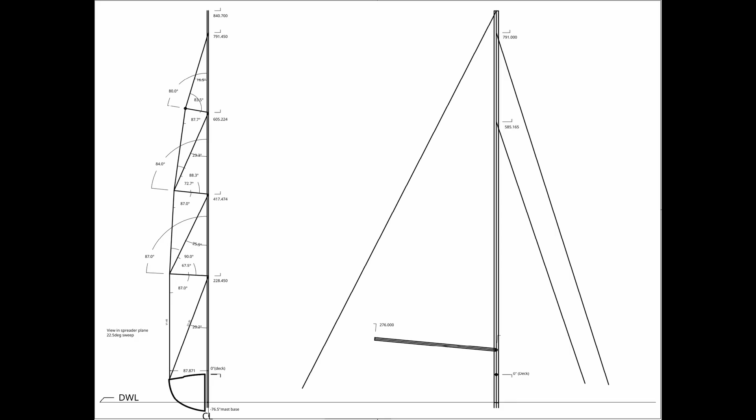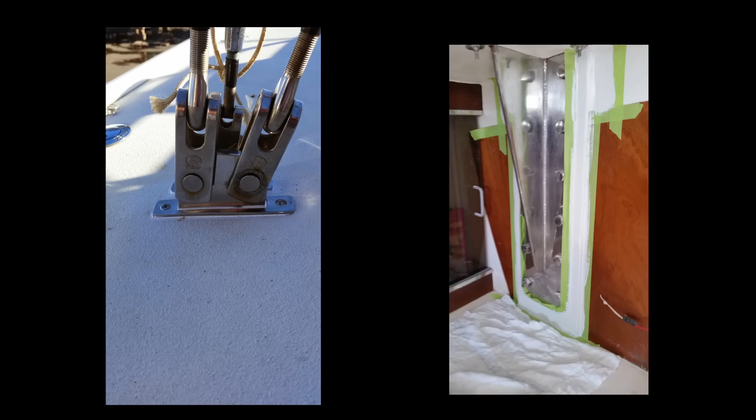For those of you who don't know what a chain plate is, it is a very important piece of a sailboat that connects the standing rigging of a mast to the hull. Usually they are built out of stainless steel, but we are building ours out of carbon fiber.

One of the most fun and surprising parts of this project has been the incredible support that we get from the community surrounding it. One of those people that has been helping so much is Evan, the naval architect. He has been helping us from the very beginning of this project, and one of the reasons I really like his help is because he is also a cruiser, and I feel like him and I have the same kind of philosophy when it comes to what we wanted out of the boat.

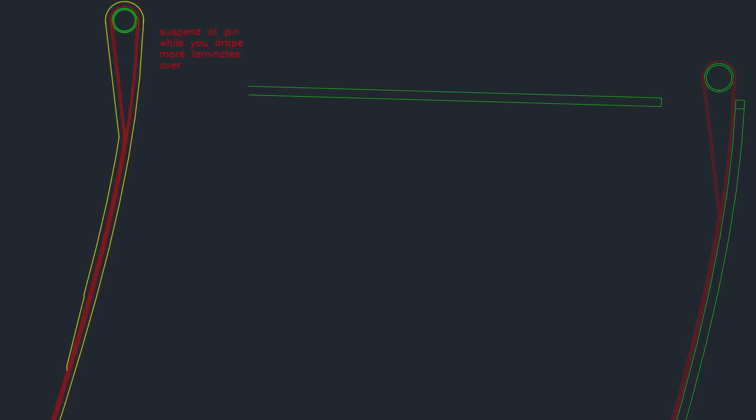He has been helping us from the very beginning, doing stuff like help design the backstay chain plates. He helped me evaluate the masts that we were looking at, making sure that they would work in the boat. And most recently, he's helped a lot with designing the shroud chain plates. We got to talk with Evan on Zoom a couple weeks ago for the first time.

Would you mind telling us a little bit about yourself, like what your sailing experience is? I've been sailing since I was about 10 or 12. My wife and I met at sailing instructor school. So we were at a school to become sailing instructors. And so we had this shared background and we decided to go off and see the world. So we bought a 30-foot sailboat and sailed down to Mexico in our late 20s, early 30s, and ended up on the East Coast of the United States.

And there I got a job working for Bruce Farr's company, Farr Yacht Design. So I was involved with a lot of high-end design work. So America's Cup boats and Volvo Ocean Race boats and IMS racing boats. And so I got a lot of composite design experience there, which was great. My actual naval architecture background, I'm a mechanical engineer by training, but all the electives I did were naval architecture electives. We moved back to Vancouver.

We bought another sailboat, this time a 40-foot catamaran. Did a huge refit. I always promised my wife I'm never going to build a boat, but I built about half a boat. You go through 100 gallons of epoxy, I think that's about half a boat's worth. So we did a major rebuild, refit, and sailed around the world in that one.

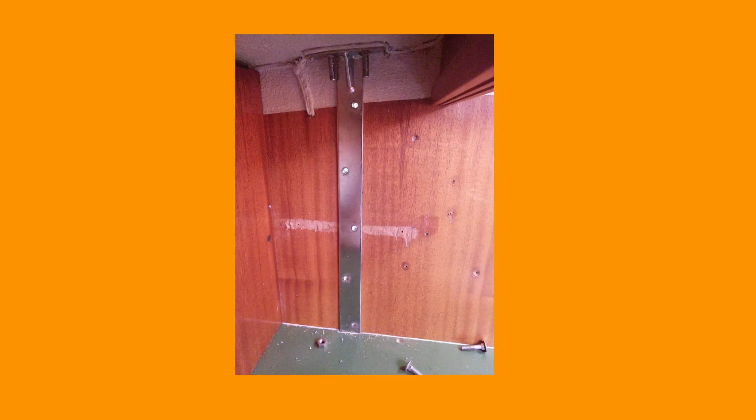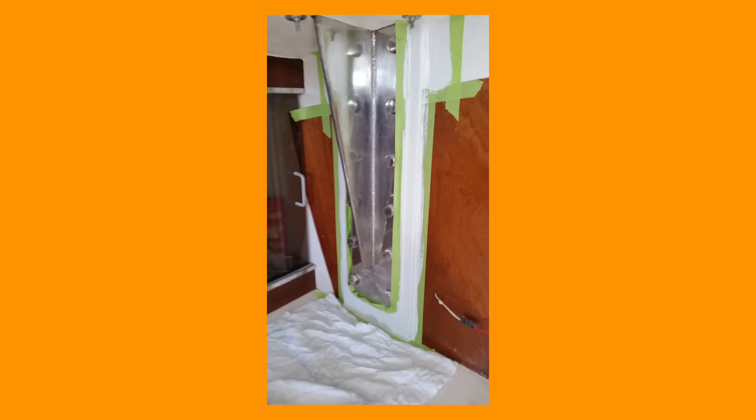Builders like stainless steel chain plates because they're cheap and they're fast. They take a piece of flat bar stainless steel, they drill half a dozen holes and maybe one big hole at the top for the turnbuckle, and they bolt it on the boat with some caulking and that's it, right? The installation is quite quick and it's very cost effective. So that's why builders like stainless, and it's the default for most boats.

If you look at the world of high-end custom race boats, everyone does carbon chain plates. And even though the disadvantage is cost and labor hours, right? They take longer to build. There's a bunch of advantages.

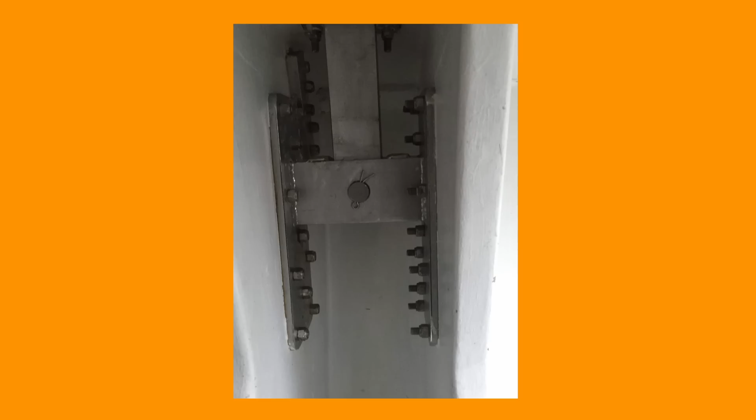They're lighter, right? A big heavy piece, especially on the size of Duracell. I saw you taking out the old stainless chain plates, right? Those are tens of pounds as opposed to a few pounds for a carbon chain plate. So there's a weight advantage. The bigger advantage, I think, that a lot of people don't recognize is durability and bulletproofness.

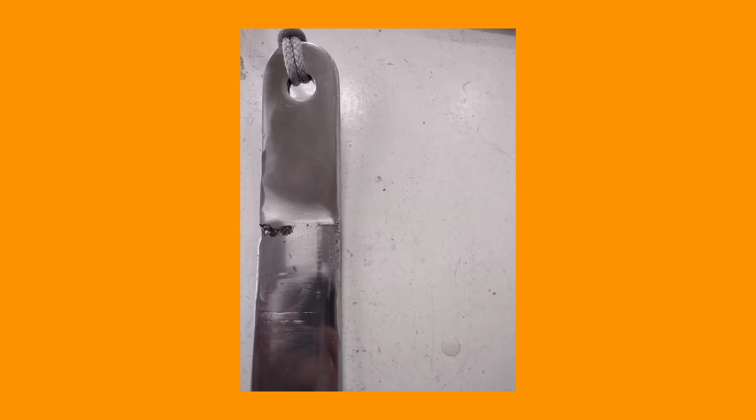When you design a carbon chain plate, because the stuff is so strong, you can put in enormously large safety factors, which, everyone likes to look at the chain plate and think it's never going anywhere. But with stainless ones, you see a lot of chain plates after 20 years, they get crevice corrosion. If it passes through the deck, prime spot, you'll see pitting and stuff like that. And it also fatigues. And you don't see that happening a lot of the times.

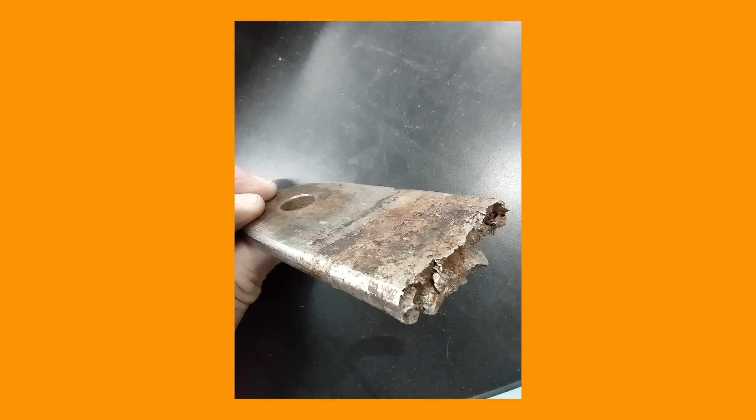And you just have to look at how many people lose a mast because a chain plate cracked, either corrosion in the back of it or it was embedded in fiberglass, but there's so many ways it can fail. So I sort of think of it, carbon fiber is the better choice if you can do it, mostly because stainless is not that great for long-term durability. It looks nice and shiny when it's new, but 10 or 20 years down the road, probably closer to 20 years down the road, there are real issues with it failing.

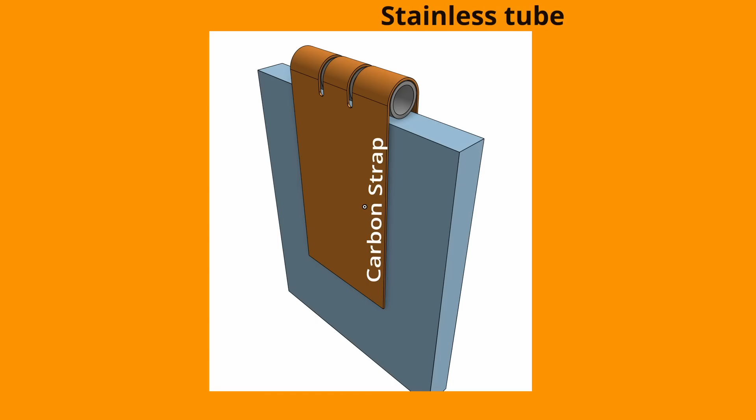This is the basic concept of how a carbon chain plate is built. A strap of carbon goes over a tube which is all laminated to the boat. This can be done many ways, in knees or bulkheads, or just installed into the hull itself. The tube and carbon then have slots cut into it to fit the toggle for the turnbuckle.

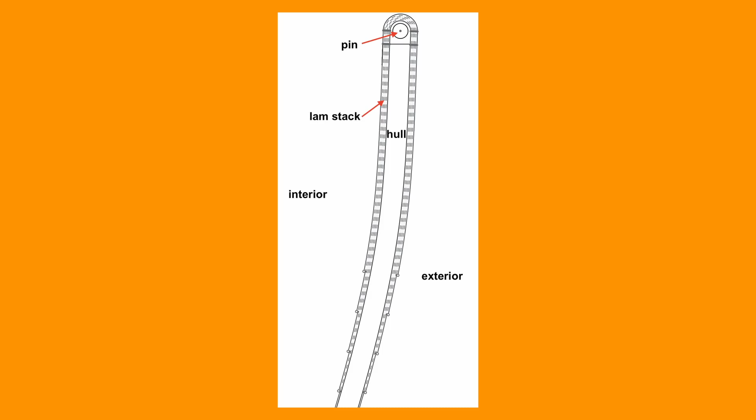Evan and I started the design work for these months ago. Initially, we were planning to just go from inside the boat to outside the boat with the strap, with the tube being up on top of the rail. The biggest issue with this is having to fair in a big lump of carbon that would be on the outside of the hull. So Evan suggested that we just laminate the entire thing to the inside of the hull. We went through a few more design iterations before ending up here with the final design.

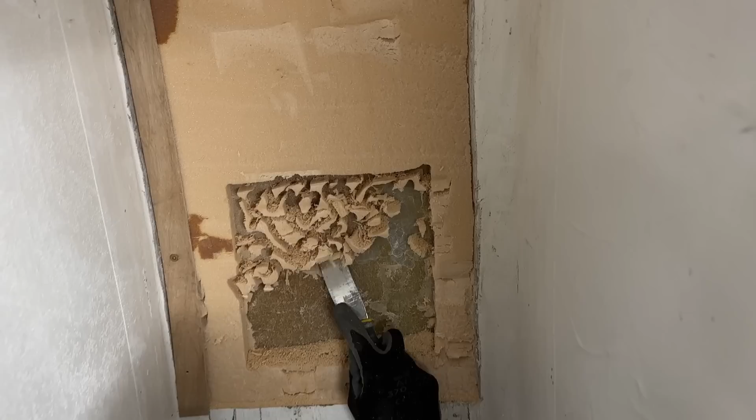Now, before we could build and install the chain plates into the hull, we had to reinforce this area so that the load of the chain plate can be distributed down into the hull. So last week you saw that I removed the inside skin and the core, and we replaced that core with solid fiberglass. Evan will help us understand why that's necessary.

Okay, so one thing that I was thinking about when I was suggesting, hey, we should really do this as a single skin, is we don't really know how well that core is stuck to the skin. So that was sort of giving me the sleepless nights sort of thing. And as an engineer, I've learned to pay attention when you just don't feel comfortable with things. So you could distribute the load by fanning out the fibers to some degree, but you can't do them at big angles to get a big enough patch necessarily.

So I was sort of thinking with the core, look, if we just take the core off and laminate on the inside skin, we're gonna know what we're dealing with, right? We will have a solid skin that's strong enough to take the loads. So we thought, yeah, the single skin is good. It grabs the two knees that are already there, ties them all together, and gives us a really strong, brand new layer to work on that hasn't seen decades of sailing too, right?

So how do we know exactly how strong these chain plates need to be? I start with the breaking strength of the wire, right? Then I add a safety factor on top of that, a big safety factor, and that's the load I use to design how much carbon I need. But the thing that you realize is that when you're sailing normally, you're never exerting the breaking strength of the wire, right? It's down around 20% for a cruising boat. So you sort of got a 5-to-1 safety factor on the actual load that's applied day in, day out.

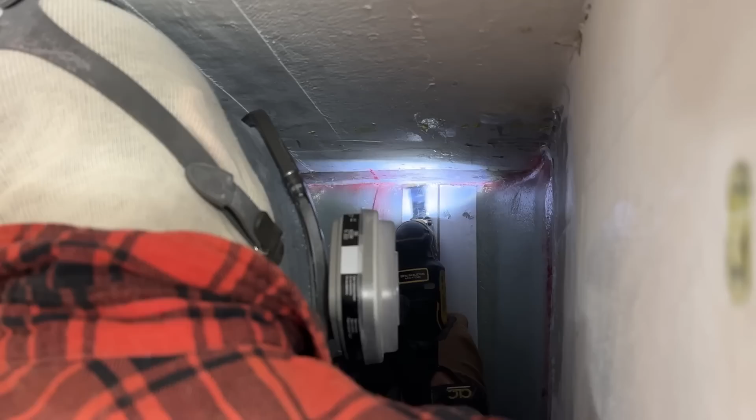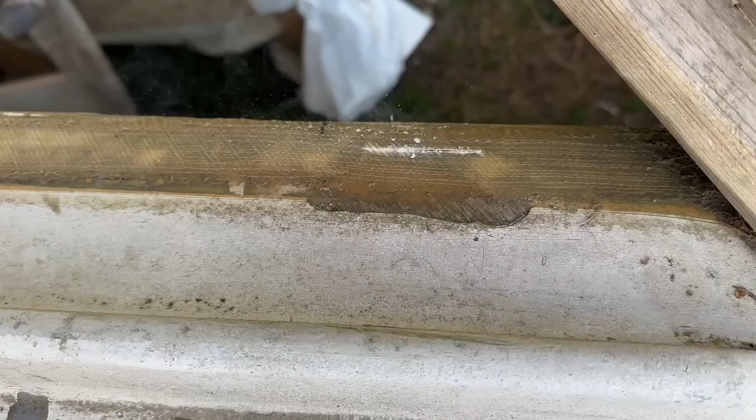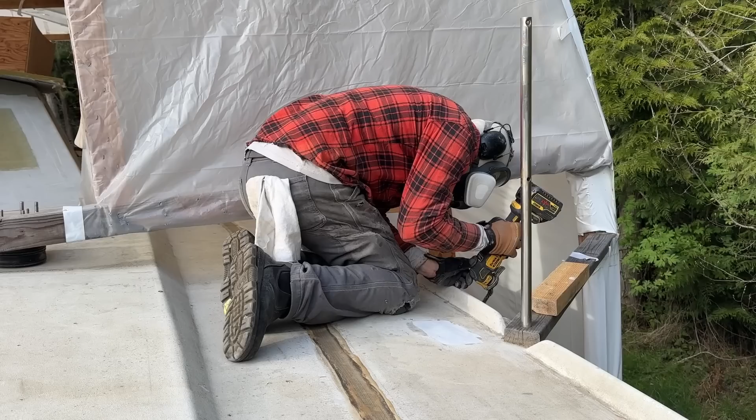It's time to cut the holes in the deck for the chain plates, so the chain plates will extend. That white tape indicates where the vertical chain plate will be, so it goes all the way down there, all the way up to above the deck, and so we're going to cut the hole in the deck to make room for both the vertical and diagonal chain plates. So here we go.

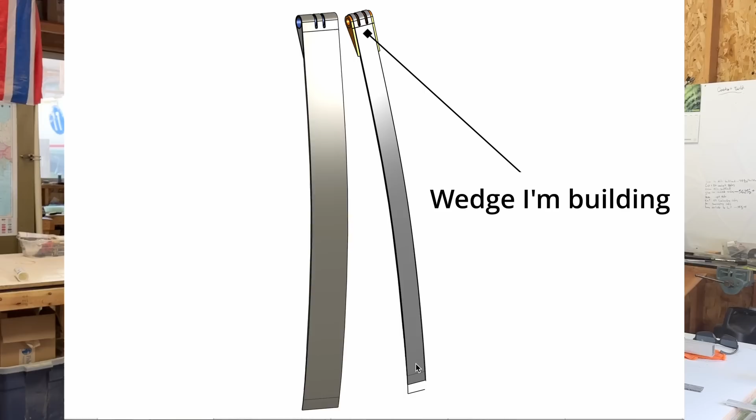All right, so I'm making these wedges which go at the top of the chain plates. Very top of the chain plate is where the pin goes through. This is where the pin will connect to the toggle, the turnbuckle in the shroud. Tube will be at the top. The pin goes through. The pin will obviously be longer than this one, but it'll go in like that. These will be laminated into the chain plate.

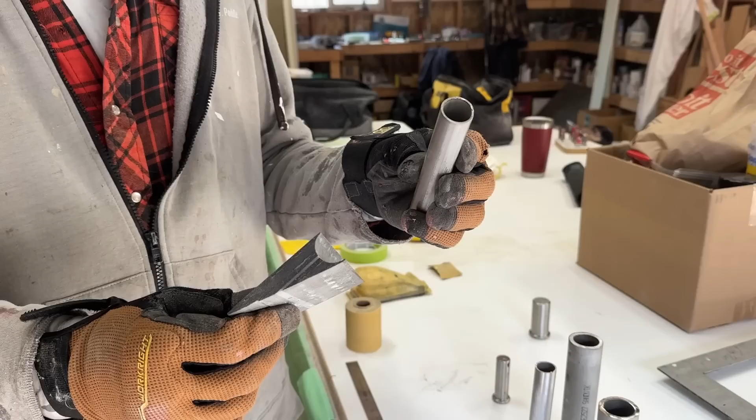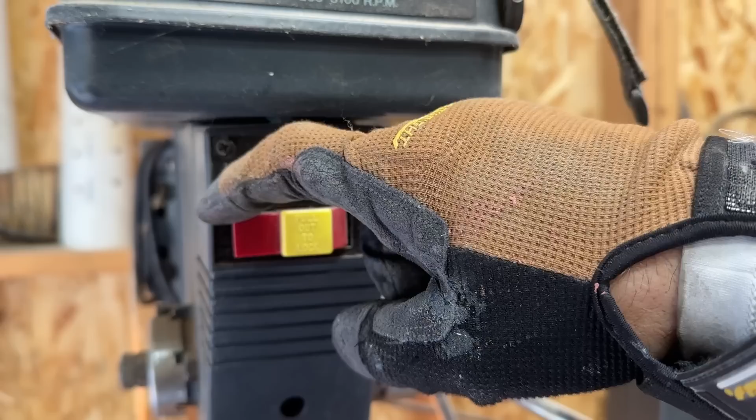This is a stainless steel tube. They will sit on top of a little wedge, and this wedge just helps taper the carbon together so that it's not such an abrupt corner on one side of the chain plate. You'll see as we start building them. But so I'm cutting these wedges right now. This is just Coosa board. I'm laminating a couple of half-inch pieces together for the smaller ones, and then we have bigger pieces for the vertical chain plates.

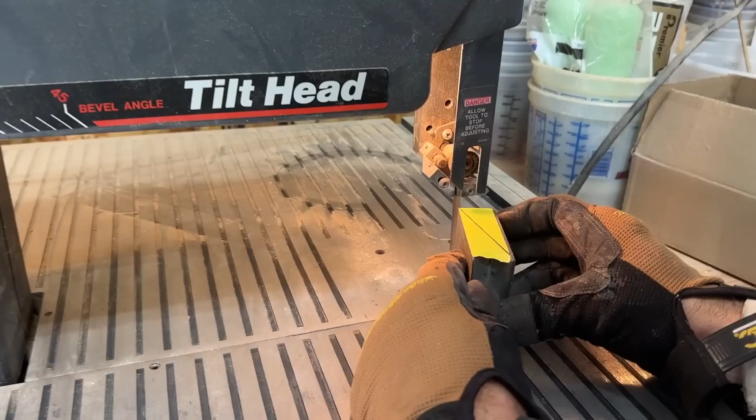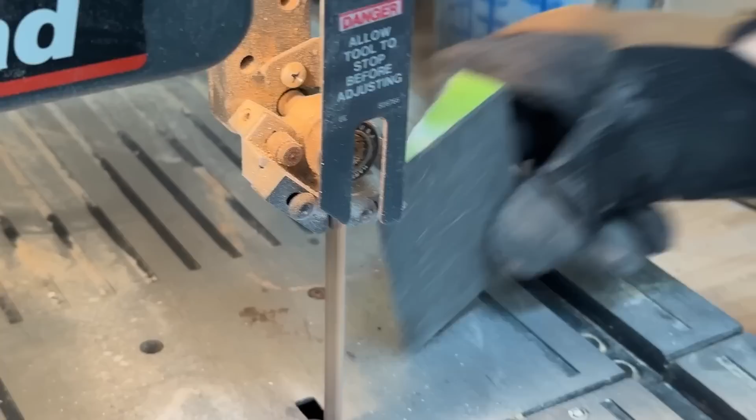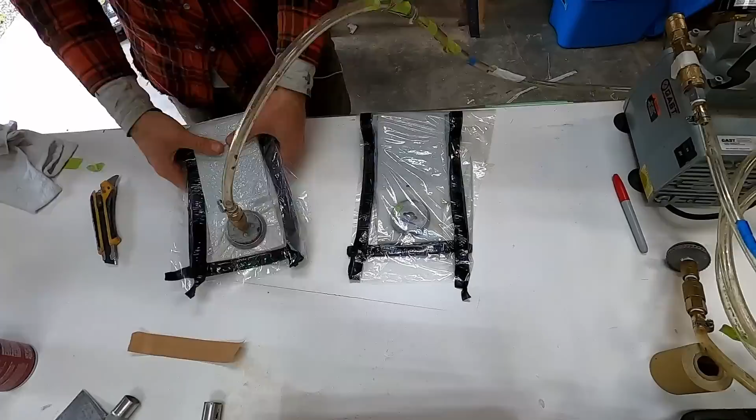So this tube will be glued to the top of this and laminated over with fiberglass first. Carbon, when it comes to electrolysis, is like metal, where if carbon is touching stainless, one will corrode. We have to insulate the stainless steel from the carbon, so that's why I'll not only glue this tube onto the wedge, but I'll also laminate fiberglass over it to make sure that the carbon and the stainless don't touch each other. But yeah, pretty good fit for the diagonal chain plates. Later tomorrow I'll get to building the vertical chain plate wedges.

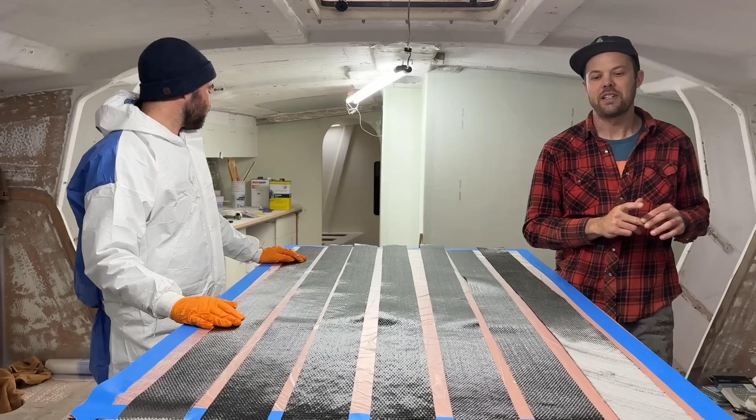Somerset and I have been working tirelessly to get this first chain plate lamination done. It's been a whole bunch of futzing trying to get the wedges in the right place and everything, and just doing a lot of prep work. But we're finally ready to do the first laminations of the two vertical chain plates, so it's really exciting. Salty's been here with us all weekend, giving us a hand. This is 1/6 of the first chain plate right here. And so we're going to wet out all this carbon, wrap it onto the wedge, and vacuum bag it into its place. I'm pretty nervous, but it's pretty exciting to get this done.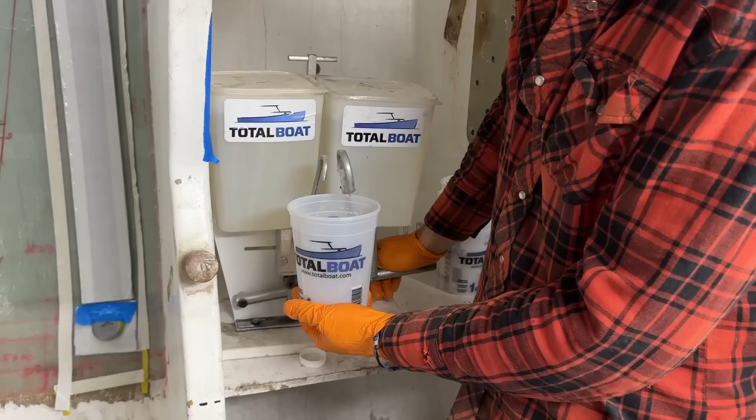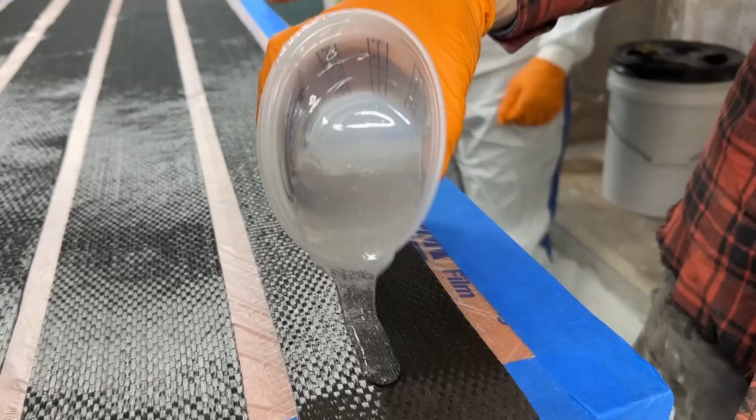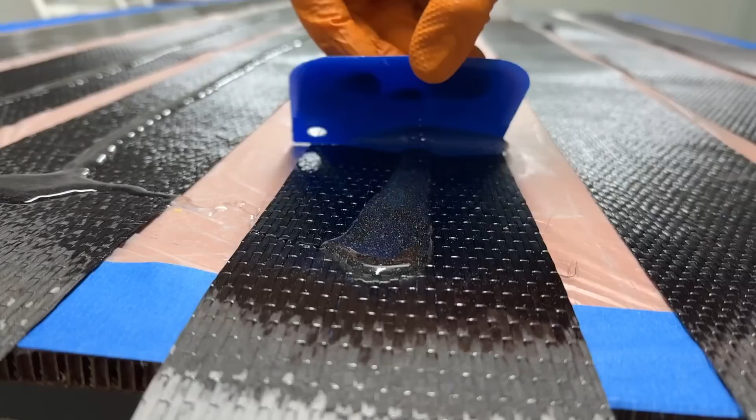So why are you nervous? What could go wrong? Many things. It's important that we get a nice tight lamination onto the wedge and down the hole so that there's no wrinkles in the unidirectional carbon fiber, which is pretty difficult to do. I'm nervous because these are incredibly important pieces of the boat, and we need to do a really good job building them so that we don't break anything. Steal some.

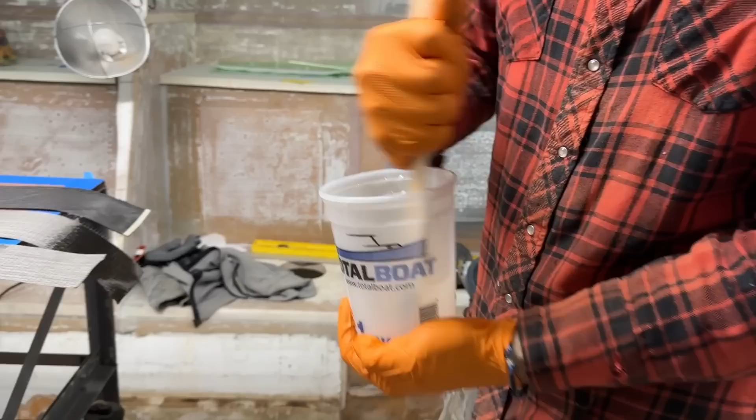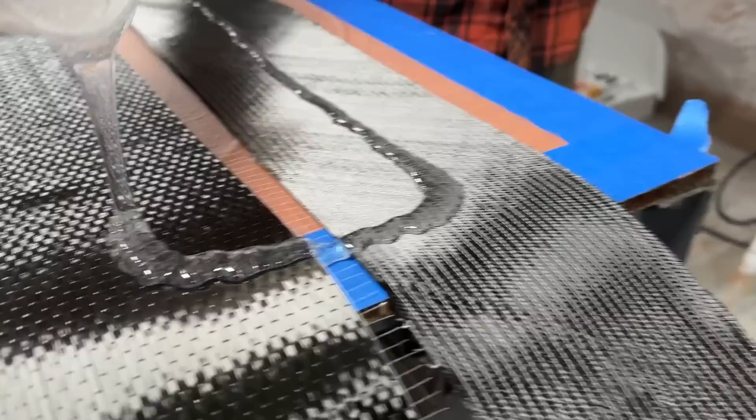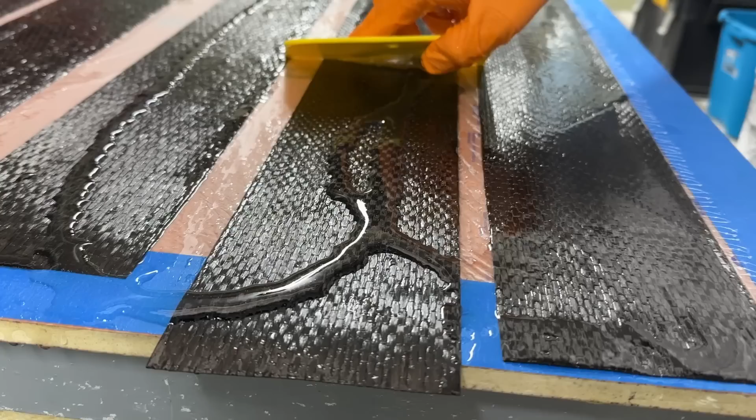How long have you two known each other? We went to college together. We were roommates in college in 2007. Yeah. And you've done many, many miles at sea together. Mm-hmm. Will you tell us a story from one of those times? A tale from the high seas. Matt made a ceviche. God, that wasn't the story I was gonna go to. Do tell. Got the whole crew deathly sick. Matt denies responsibility. It wasn't my fault. It was the Australians' fault. It was the Aussies' fault, he says. It could have been. It could have been. So the whole crew was sick? Yeah, everyone except for the captain, luckily, because he didn't eat any ceviche.

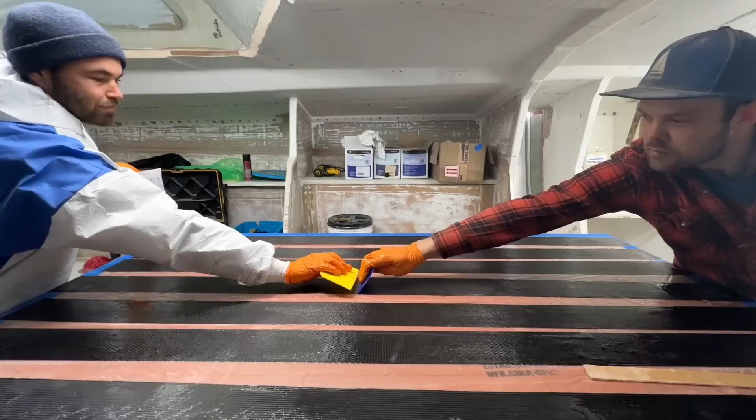I was just gonna say the fastest I've ever gone on a sailboat was when you and I were on watch together. You were driving around Cape Mendocino or Cape Conception. Yeah. We had like 25 knots or something. Yeah, on the Baltic. Yeah. Was that the really, really stormy time? Yeah, it was pretty gnarly. It was fun though.

It was a fun ride. It got less fun later. It broke the outhaul and couldn't properly reef. Yeah. I was crawling out on the boom trying to reef. 40 knots. It's 3 a.m. Yeah. Okay, you ready, honey? Ready.

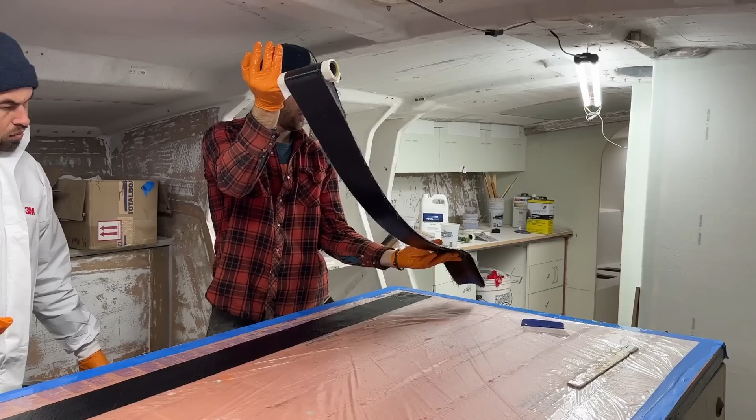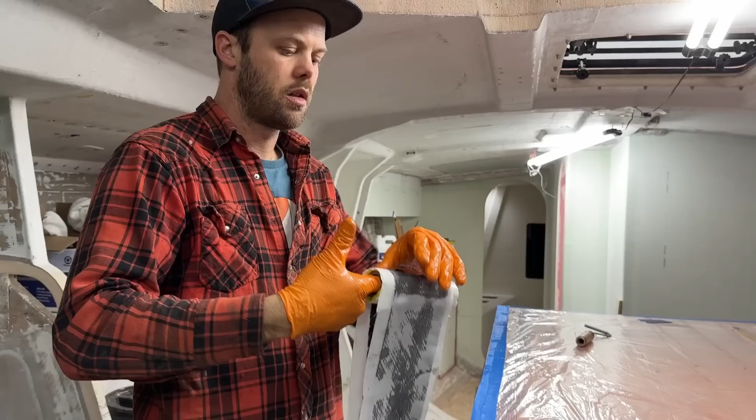Cool. Okay, why don't you take your gloves off and then grab a couple peel plies for me? Okay. Show me the long one first. Yeah, that's good. So, I'm gonna go up and ease it down. Okay.

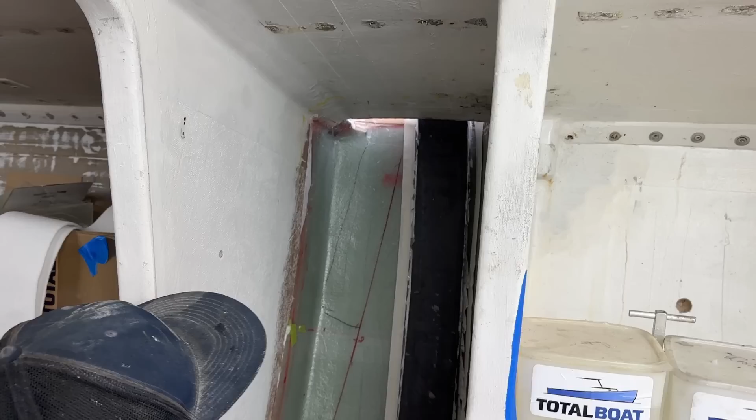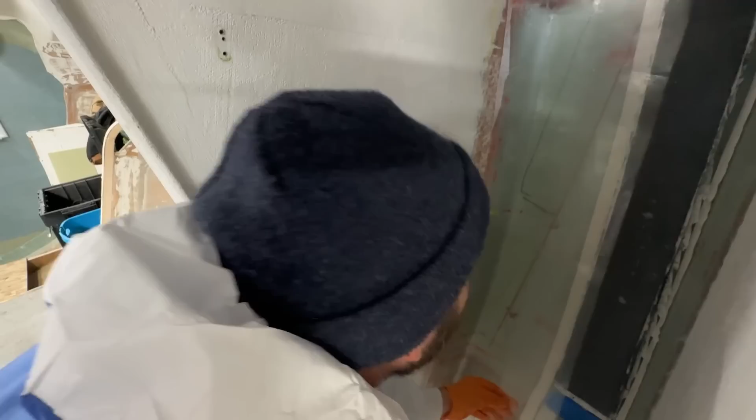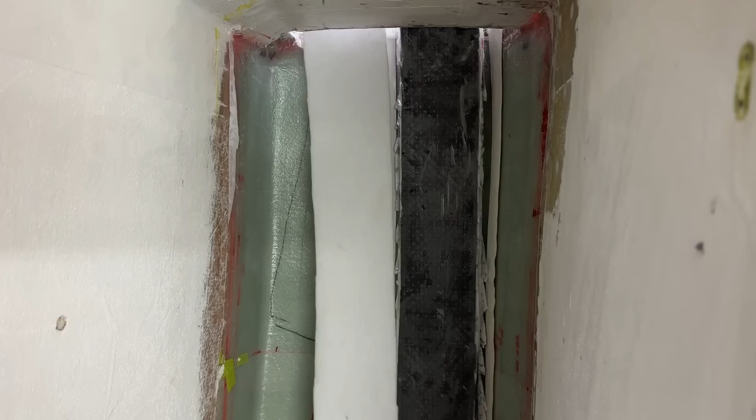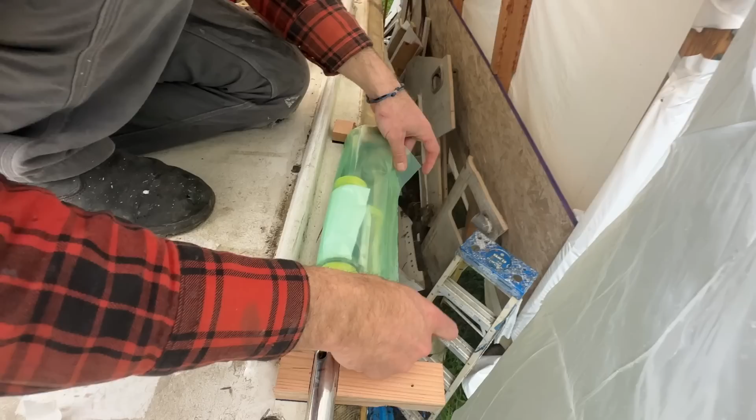Go ahead and take up a little bit. Keep going. Right there's good. Okay, I'm gonna shimmy over. Okay, I'm gonna get mine attached first. Okay.

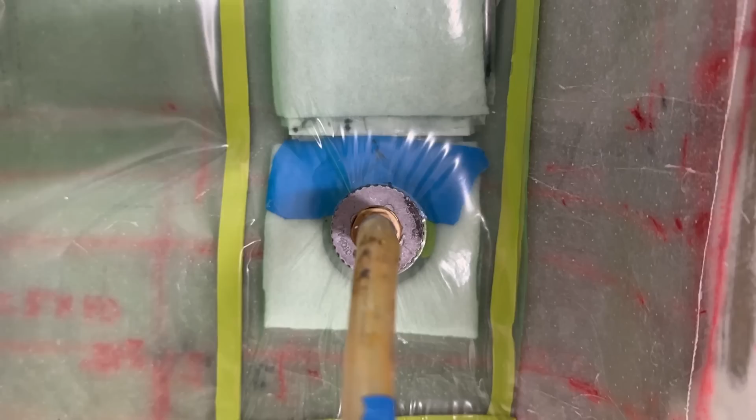How did it go? Went okay. I think there's a few things we gotta change about our process, but it went well enough. Well, luckily you have a second chance on the other side, right? Yeah, exactly. It went well enough, for sure. Well, we'll see tomorrow when I pull it off. Can I get a high five? High five. Oh, okay.

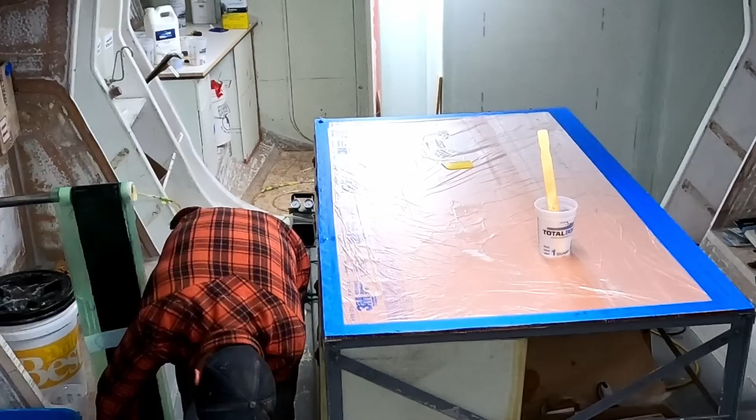Later that night, after Salty had to go on a date, I decided to lay up the starboard side chain plate. I changed up my process this time in a couple ways. I stacked the laminates on a piece of plastic as I wet them out, and squeegeed out as much resin as I could while stacking them. Then I grabbed the whole stack and laid it over the wedge which was hung in place. This made it a lot easier to maneuver and to square up the laminates as I laid them over the wedge. Then I just peeled off the plastic to finish preparing the chain plate for the rest of the layers to go on.

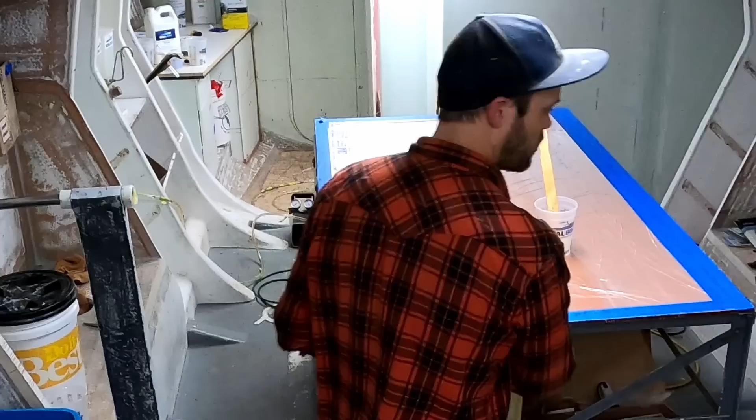I could also easily get all the other materials onto the carbon before slipping the wedge off its hanger and taking it up on deck to slip it into position to vacuum bag it in place. We just turned the vacuum pump off. It's the next day after we've done the laminations of the first two chain plates, so I'm going to take this bag off and see how they look.

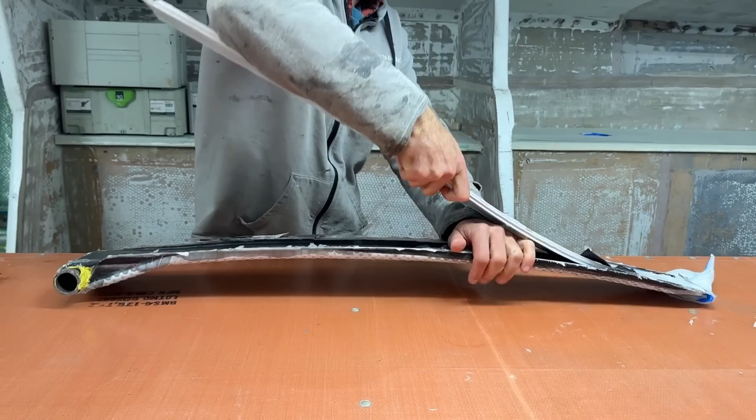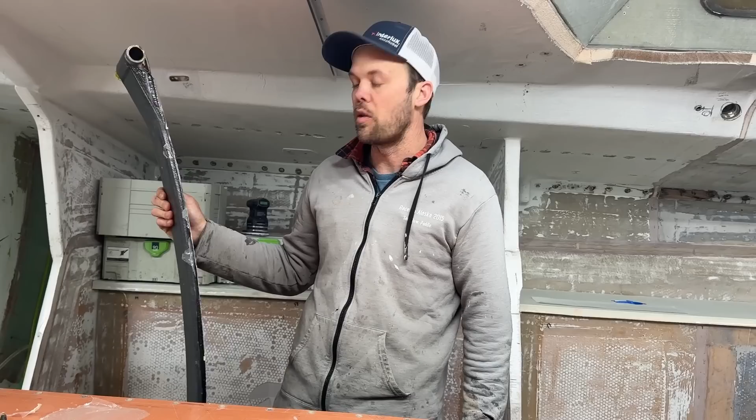Cool. This is 1/6 of the layers that are going to be going onto this thing. Seriously? Yeah. So it'll be massive by the time this thing is done. The whole reason that we did it like this is that if I were to lay up all 36 layers onto the hull at one time, it would have been impossible. It's way too many layers.

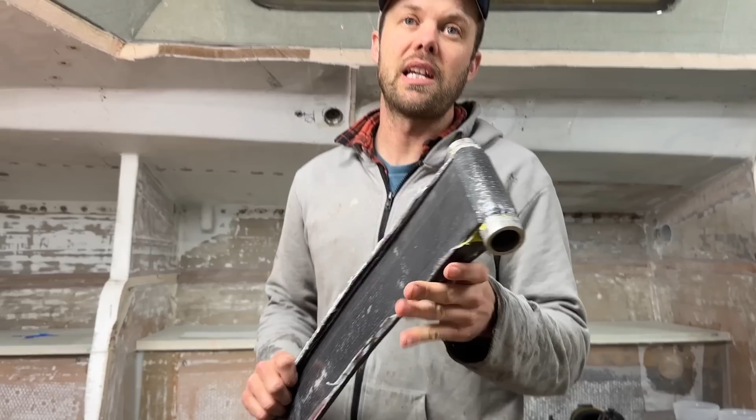We know this has been a long episode. We could have made it way longer. There's a lot to explain. I'm sure there's plenty of questions that you'll have. We'll try our best to answer a lot of those in upcoming episodes.